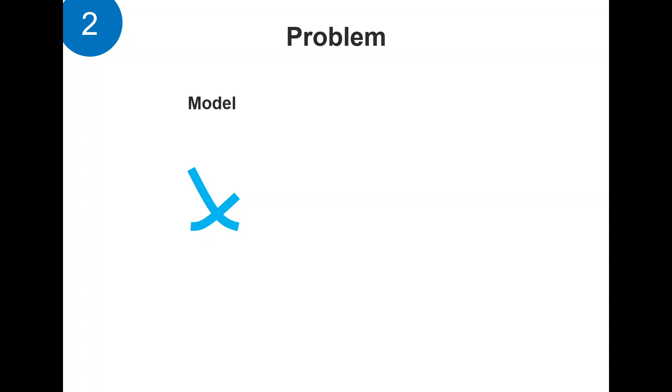So the multi-phase flow material balance technique that we've implemented in Whitson Plus solves a very fundamental problem. And the problem is easy. All multi-phase flow material balance techniques, or multi-phase problems in general, require relative permeabilities as an input, while in reality we don't have relative permeabilities in tight unconventionals, either because we can't measure them in these tight unconventional rocks, or it's very, very seldom to even have an attempt at measuring these. And we can't calculate relative permeabilities from readily available data, like we can do with a lot of other things.

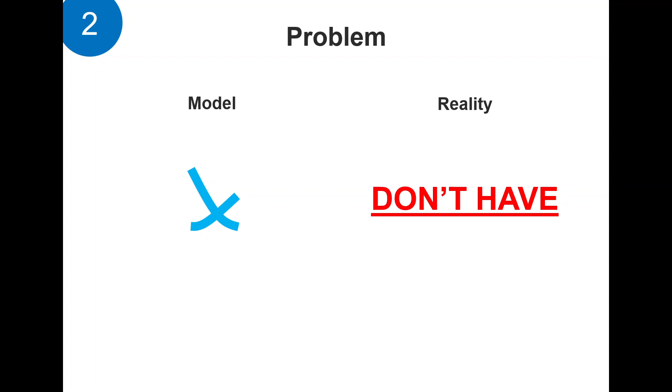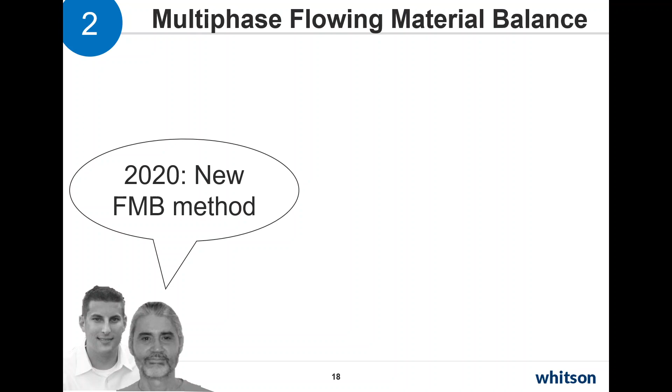So that was why we got very excited back in 2020 when Leslie Thompson and Barry Ruddock, who were working at Cimarex at the time, which is now Coterra, came to us and said, well, we've developed this new multi-phase flow material balance method that does not require relative permeabilities as an input, is geometrically agnostic, so it doesn't care about what geometry your tank has, and it outputs the contacted pore volume or the contacted oil or gas in place. And all this sounds way too good to be true. So I remember, at least I was very skeptical at first, believing what they claimed to be correct.

But after verifying this technology versus a wide range of simulated results, probably hundreds and hundreds of simulated results where we actually know the answers and we've changed all the fluid systems, all the relative permeabilities, etc., I feel very, very comfortable with the methodology. And we've done it internally at Whitson. A lot of other companies have done it as well, Coterra being one of them. And now there's a lot of companies that use this technique for every single well in their acreage.

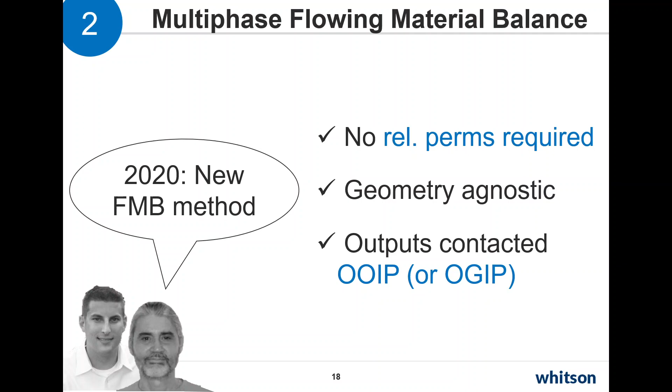So multi-phase flow material balance is a technique that works. It does not require relative permeabilities. It outputs the contacted pore volume, and it's geometrically agnostic. However, it assumes boundary dominated flow, or so-called pseudo-steady state, which means that if you have a system that is still in either infinite acting flow or transitional flow, it will provide you with a conservative lower bound of your contacted oil and gas in place.

And that is actually very valuable, especially when you want to bring this into RTA analysis, for instance, because it helps you bound these results on the low side, which in many cases can be really important, especially when you're dealing with very noisy data.

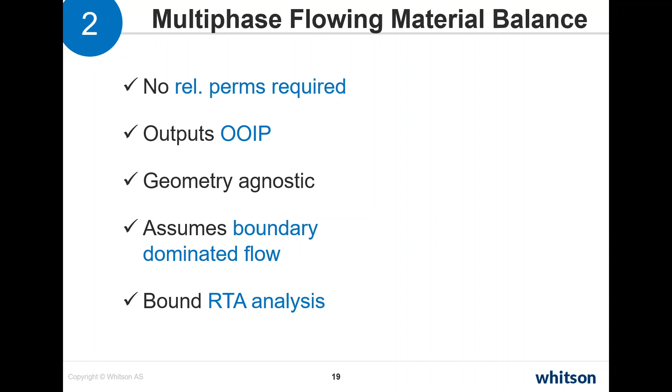The diagnostic plot is very simple. It's simply some dots on a plot, and your job as an engineer is to draw a straight line through the straight line portion of this data, and the inverse of the slope is essentially your pore volume or your oil in place or gas in place. Okay, so this is a small OOIP, this is a big OOIP, and this is an even bigger one.

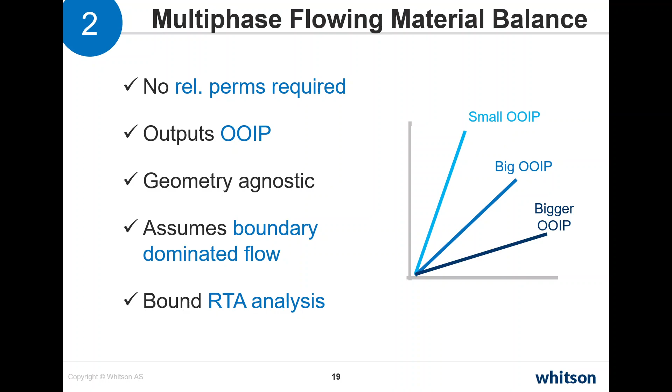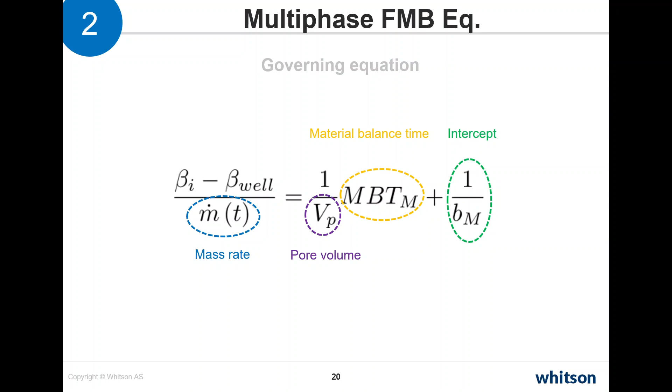The governing equation can look a little bit scary at first, but if we break it down, it's basically just an intercept. It's material balance time. It's a pore volume. Intercepts we know, material balance time we know, pore volume we know. Then there's mass rate, so that's just all the rates converted into a mass, so gas, water, and oil. And then we have this thing called mixture density change.

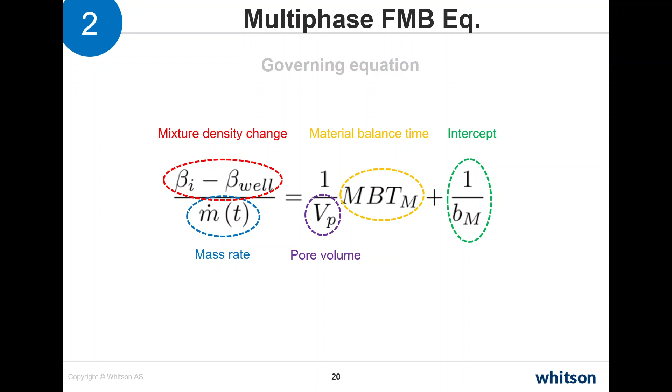That is probably a new term, but if you think about it, it's a mixture density. And what is a mixture density? Well, it's just a density. And if you take a look at this equation right here and you simplify it a little bit, which I always like to do, we see we have density and we see we have mass over volume. And density equals mass over volume. That's something we all know, and probably learned about in either high school or university.

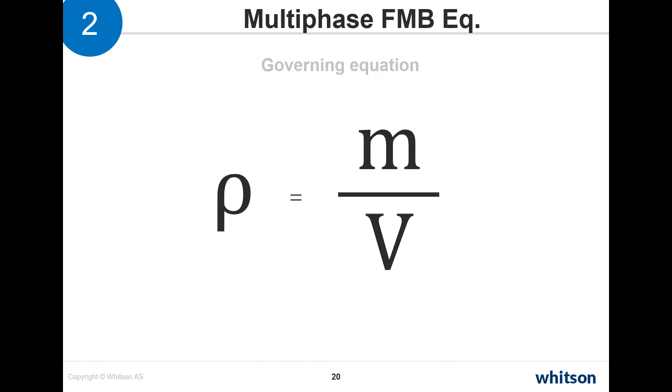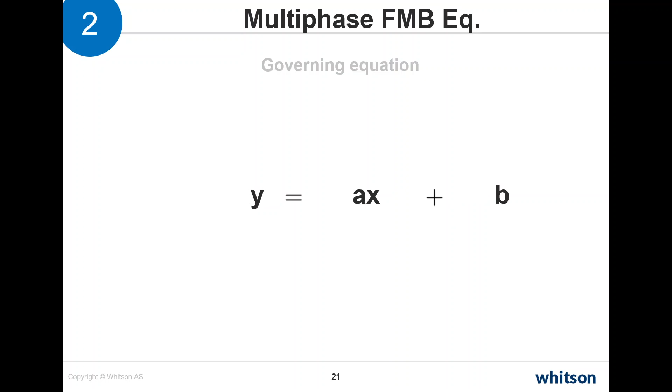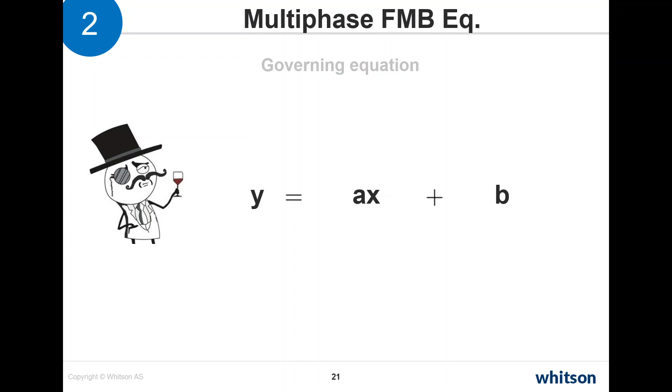The other thing that is really beautiful with this equation, if you break it down, is that it's just a very simple relationship. It's y equals ax plus b. Okay? That's any engineer's dream scenario, where you take something extremely nonlinear and complex, which is this combination of superposition and multiphase flow effects, and you're able to linearize it into a very, very powerful diagnostic plot. So that is the multiphase FMB in a nutshell.